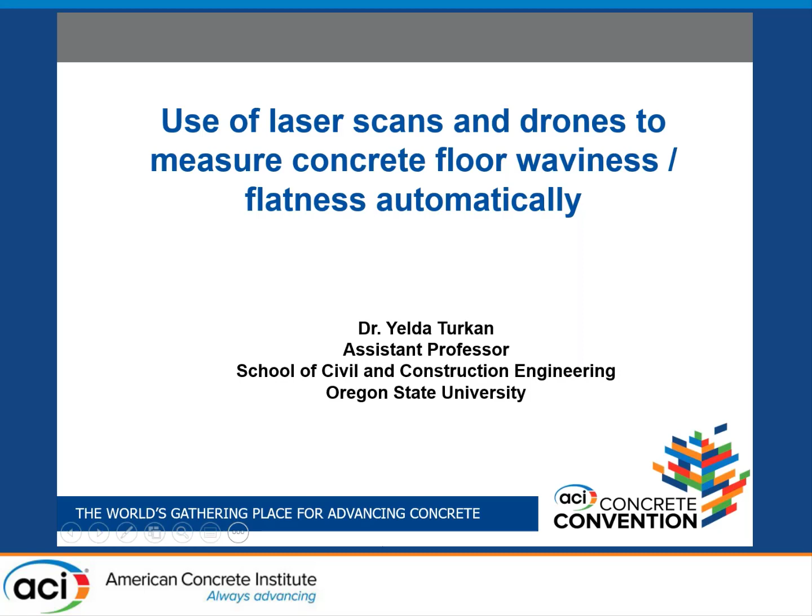Today I'm going to talk about how we can leverage laser scan point clouds and drones to measure concrete floor waviness and flatness automatically. This is an ongoing research, and I will present the preliminary results today.

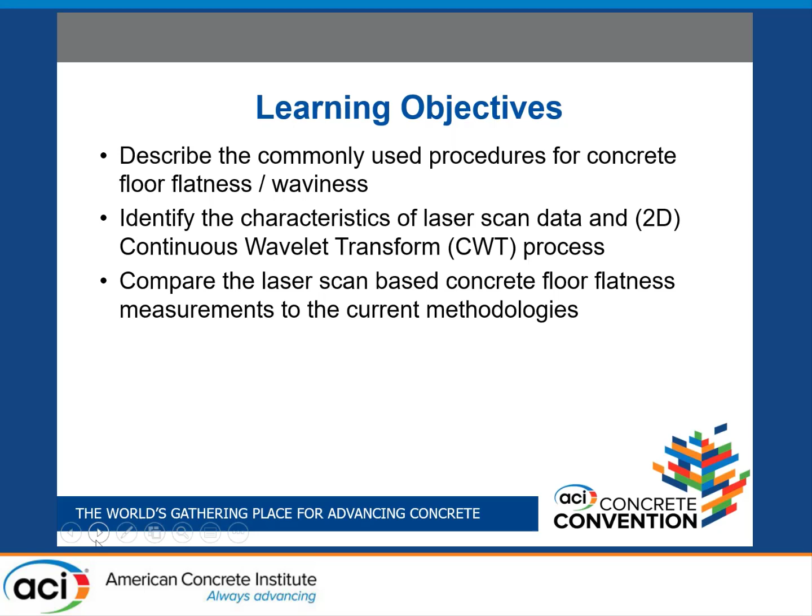Our learning objectives are: first, we will talk about commonly used procedures for measuring concrete floor flatness and waviness. We will identify the characteristics of laser scan data as well as two-dimensional continuous wavelet transform that we use to process the data. And we will compare our methodology to the current commonly used methodologies to measure concrete flatness. So why is measuring floor flatness important?

A step back - a more common term used is dimensional quality assurance and quality control. As we all know, as-built dimensions of cast-in-place concrete often differ from the dimensions originally specified in as-designed plans. Dimensional quality control verifies that elements are constructed in compliance with the specified dimensional tolerances, and failure to detect imperfections in newly constructed surfaces during earlier stages of construction may cause delays in carrying out necessary repair works, which can be very costly. Therefore, it's very important to carry out those inspections in a timely manner.

Focusing on concrete slabs, there are several factors that affect the dimensional quality of cast-in-place concrete slabs, such as temperature, placement, and finishing techniques applied during construction. Proper regulation and control of these factors are essential for achieving specified levels of waviness and levelness. Defects resulting from waviness of concrete slabs not only create aesthetic issues but also affect the efficiency of lift trucks and very narrow aisle vehicles.

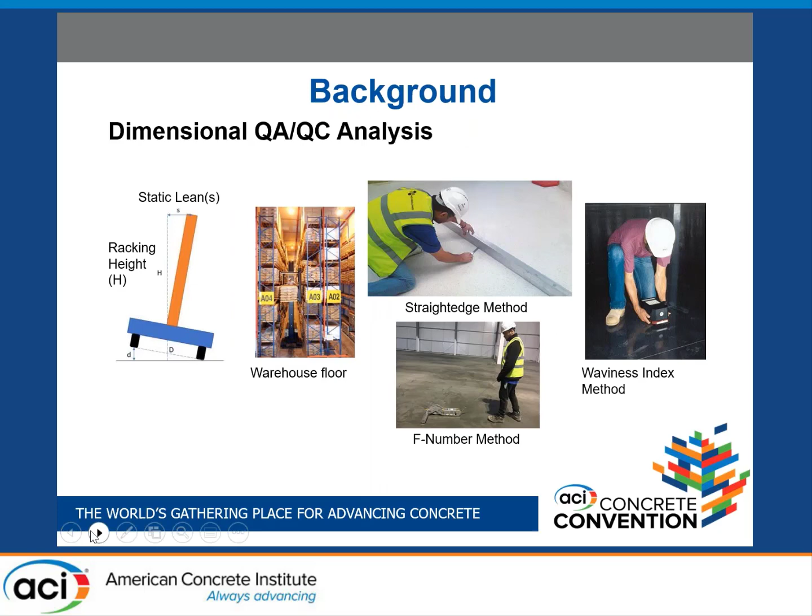So we wanted to see if we could leverage Lidar and drones to collect the data and get the waviness information from that floor.

For those who are not familiar with Lidar and drones - Lidar is also called laser scanners. They're basically high definition surveying equipment. The data you collect using Lidar equipment is basically a three-dimensional point cloud, where each point is associated with XYZ coordinates, and if there is a camera, it is also associated with RGB color information as well.

The use of laser scanners and drones within the last decade in the architecture, engineering, and construction industry has skyrocketed. You can use these tools and technologies for different applications, such as building damage assessment after natural hazards, landslide inventory, quantifying road roughness, progress tracking, and dimensional quality control is one of those.

You're perhaps familiar with drones, hobbyists use it, construction contractors started using it. The one thing about drones is that you can also attach different types of sensors to them. So it can be a regular digital camera to collect digital images or videos. You can attach a thermal camera, and in our case, we attach the Lidar sensor to the drone.

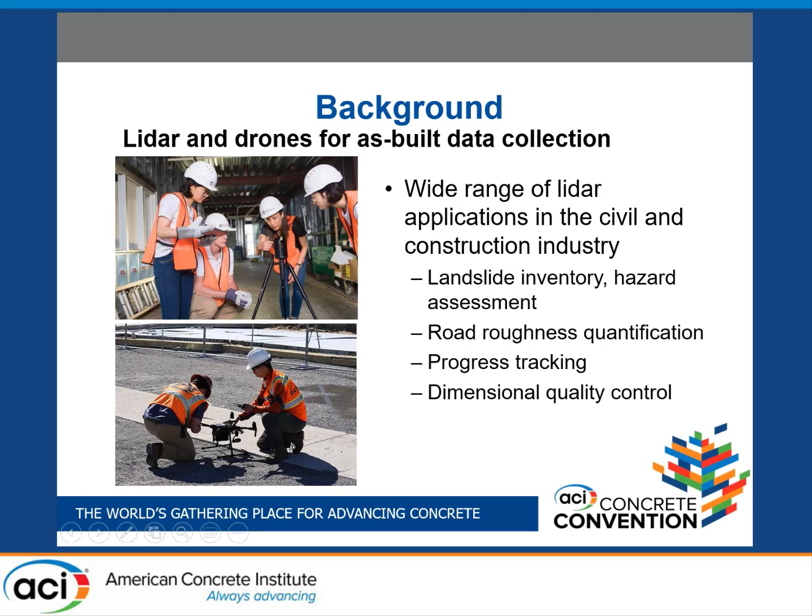So the Lidar sensor that is on the drone here and the Lidar sensor here are different in terms of accuracy. This Lidar can collect a laser scan that is very, very dense and accurate. The laser scan, the Lidar data we collect using the drone is fairly less accurate, so essentially you're collecting less data points. I will talk more about that in a little bit.

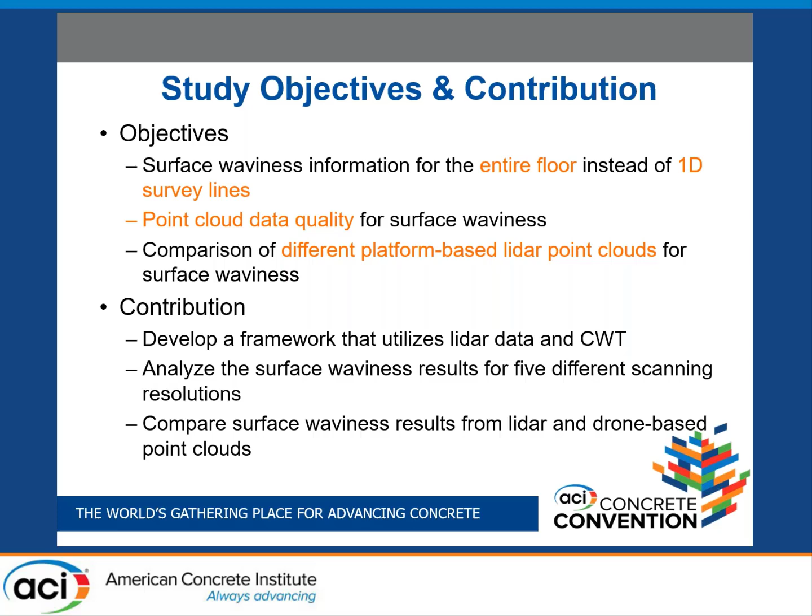Our objectives were to see whether we can characterize the entire floor using this laser scan data instead of using one-dimensional survey lines. We also wanted to look at the required data quality for the point clouds, because it may be computationally very difficult to process laser scan data if it's a very large project. So if you can obtain the same results with lower quality data, that is better, because it's easier to process computationally. We also wanted to compare tripod-based, also called terrestrial laser scanners, versus drone-based point clouds to characterize the surface waviness.

Our methodology: when you collect the point cloud data, the raw point cloud data consists of data points, in this case from a concrete slab, as well as its surrounding environment, including workers, equipment, and surrounding buildings. The point cloud is typically, for any project, a result of multiple laser scans registered together using a target-based approach. In our case, we registered 3 different laser scans together.

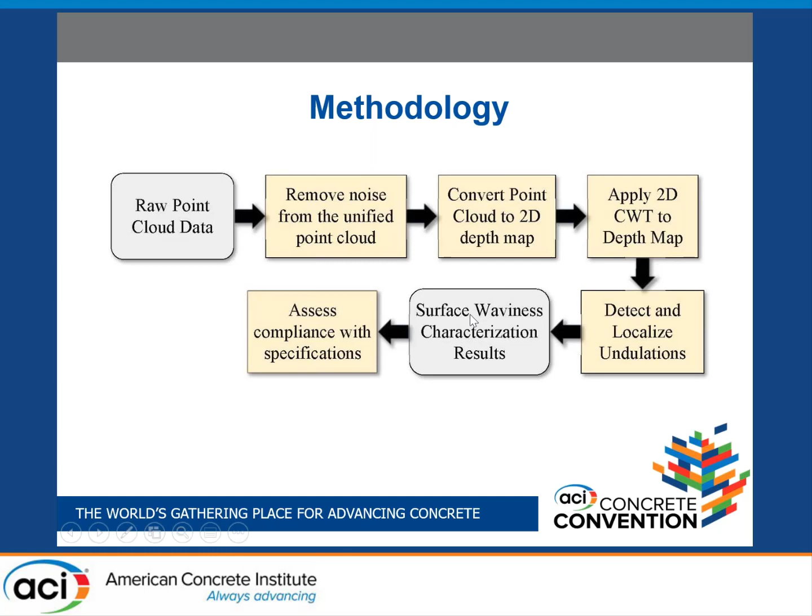Once we remove the noise and the information related to workers and equipment, that is called pre-processing. Then we developed the depth map, which we used as a signal for our continuous wavelet transformation, and we were able to detect and localize the undulations present on the surface. Then we could look at the compliance with the specifications at the end.

I'm not going to get into the mathematical details of wavelet transformation, but wavelet transformation has a wide range of applications in engineering, some of which include seismic signal analysis, sound pattern analysis, and quantum mechanics. Continuous wavelet transform of a given function basically is the inner product of the function with the scaled and shifted versions of the mother wavelet.

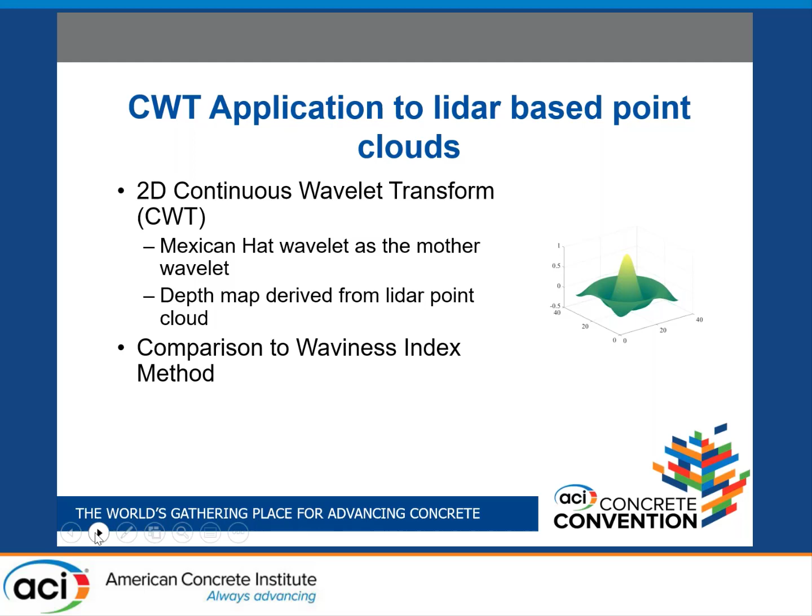This is the first case study I wanted to talk about. We collected data from a warehouse concrete project, a concrete slab. We used a terrestrial laser scanner, a Leica P40, one of their recent products.

We did the scanning within 10 hours after the concrete was poured, and the whole data collection, with all the setting up and everything, took us about 45 minutes, which is faster than collecting data using traditional methods for waviness measurements. This shows the entire laser scan, and this red portion is our area of interest. We removed all the other data points from the point cloud since we weren't interested in those parts.

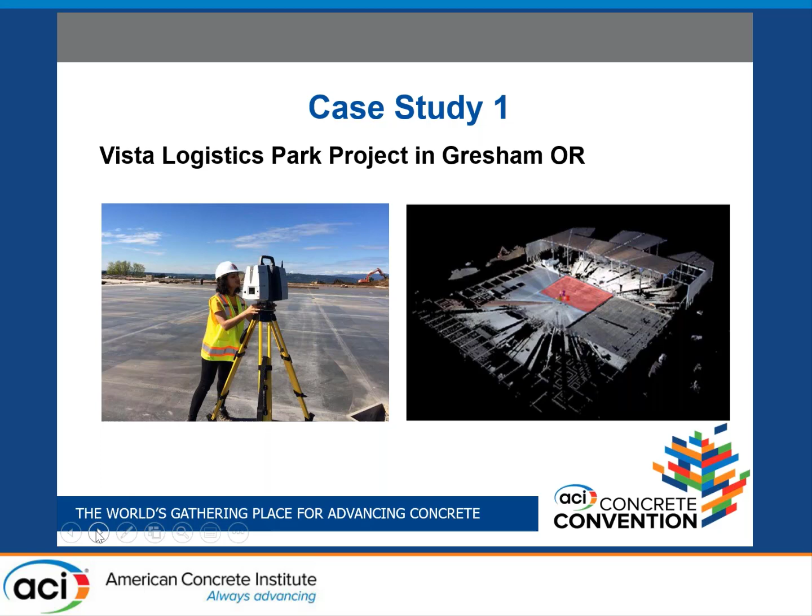We used regular off-the-shelf point cloud processing software to remove those points. The original point cloud had about 100 million points. After we removed the points we weren't interested in, we only had the points for the concrete slab, and then we converted that into a depth map with 1 centimeter intervals in both horizontal and vertical directions, calculating the z coordinates at each grid point.

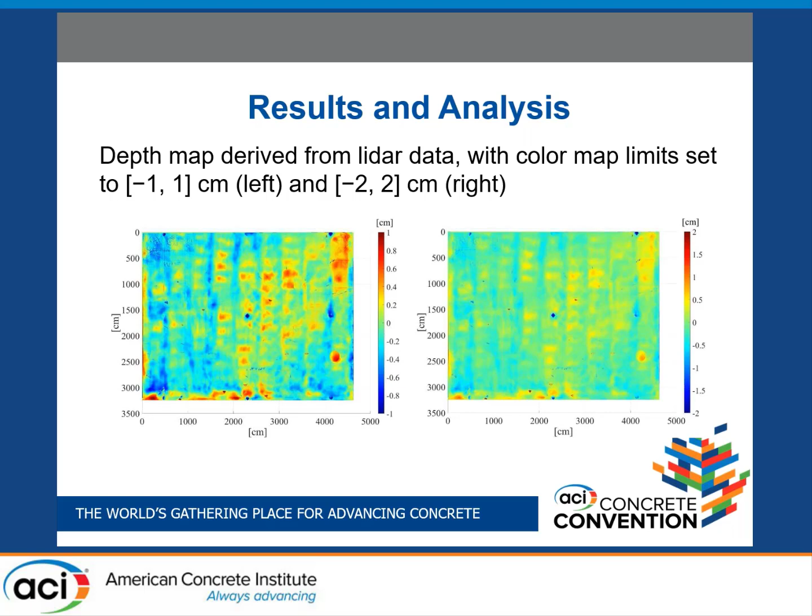This figure basically shows the result. As you see, the height differences with respect to the XY plane vary between -2 to 2 centimeters. These are the likely areas that have some undulations, because they differ from that average height. Then we applied our two-dimensional continuous wavelet transform here.

So here, these scales - scale 15, without getting into mathematical details, basically corresponds to 2 feet. So the undulations present on the surface have periods of 2 feet and 4 feet. Here you see there's a likely peak here and here as well for scale 30, which corresponds to 4 feet. And this kind of makes sense.

Everything else is pretty much at the same height, and this makes sense because in the previous depth map we saw that the slab is relatively flat with a few little peaks. In fact, the average value of the deviation in the z-axis height was 0 centimeters, with a standard deviation of 0.3 centimeters.

And the next slide shows the other 3 scales that we investigated. These correspond to 6, 8, and 10 feet. Here you see the same little peak, and in addition, in scale 60 and 75, you see an additional peak. So these show possible undulations at those locations on the slab.

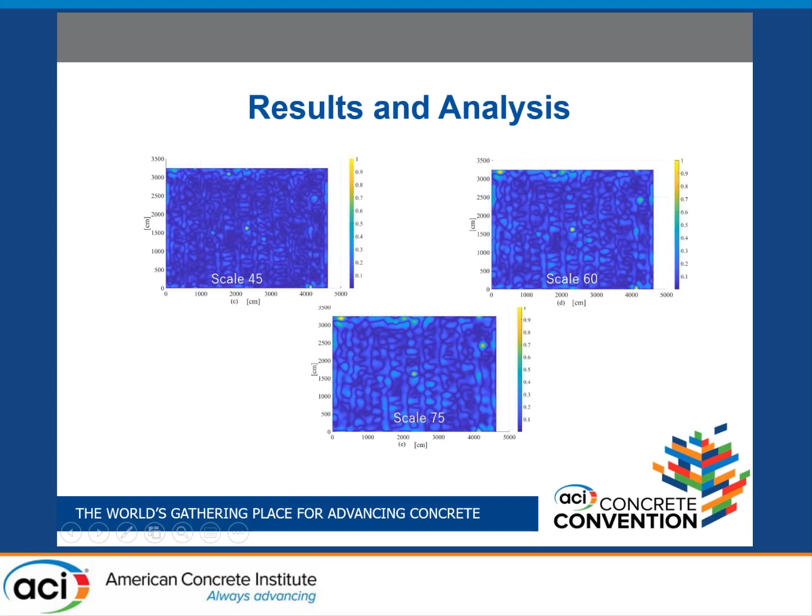This figure basically shows we applied 5 distinct periods, and this one shows the periods between 20 centimeters to 400 centimeters, which corresponds to 0.65 feet to 13 feet.

The advantage of our approach is that we combine the 3-dimensional data from laser scan and 2-dimensional continuous Wavelet transform. This can support the analysis of waviness with essentially any characteristic period, or wavelength. So this enables the approach to study waviness not just for a few distinct wavelengths like 2, 4, 6 feet, but for dense and large ranges of wavelengths.

And this figure demonstrates that these ellipses show possible areas of defects for these periods.

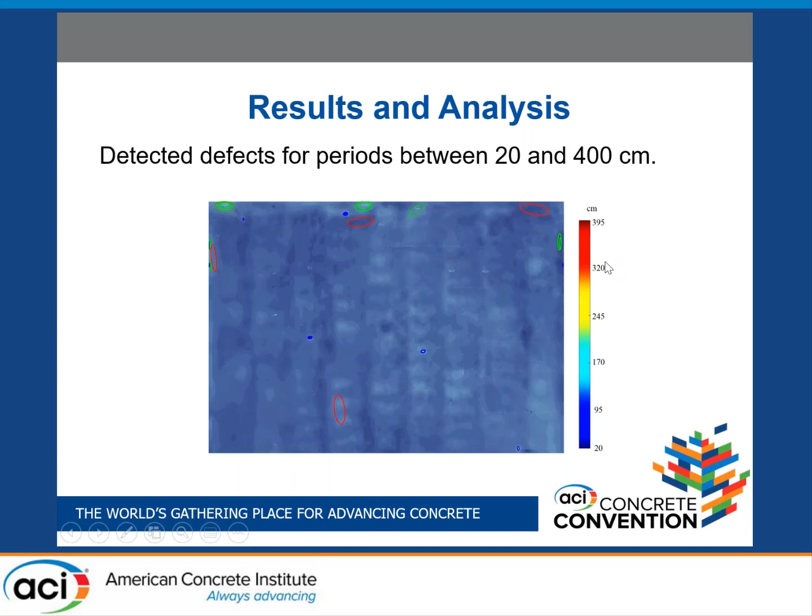In the interest of time, I will skip some of these, but we also applied the continuous wavelet transform. We applied the Waviness Index method to our point cloud data, and we compared the results to the length adjusted RMS deviation, which we call LAD, against our results from the 2-dimensional continuous wavelet transformation.

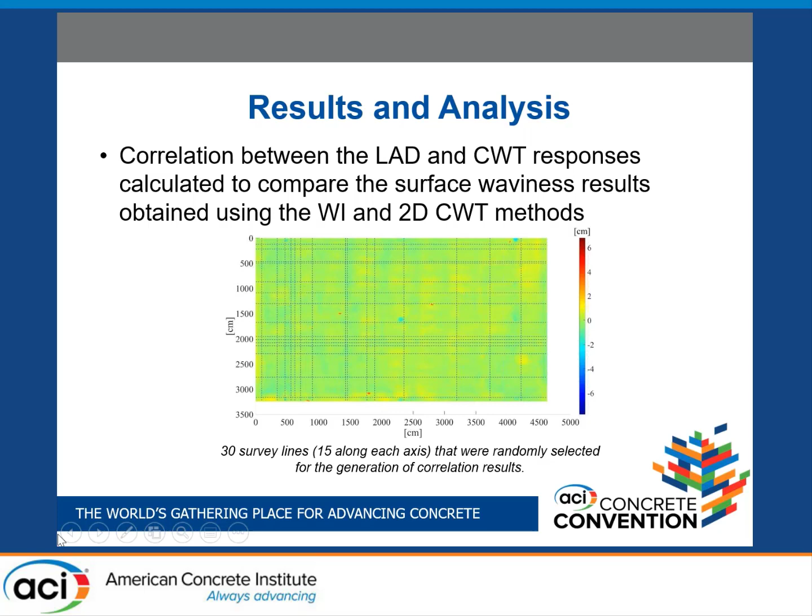We selected 30 survey lines, 15 along each axis. I'm going to quickly go through these.

So the results show that the length adjusted RMS deviation, the results we obtained using the Waviness Index, and the results we obtained using the continuous Wavelet transform were highly correlated. That basically shows that our method has promise in terms of finding those deviations and also locating them.

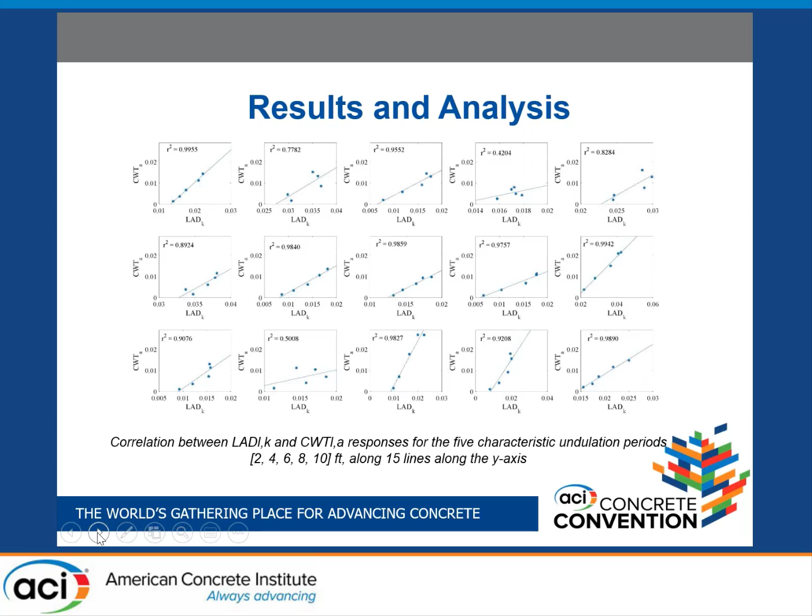So this table compares these methods as I just talked about. With other methods, you can only get information about the periods of undulations for certain periods. Using our method, you can identify those undulations for any period. You can visually see the output as a depth map, so you can see the actual location.

The errors aren't random errors. There is some systematic error that comes from the laser scan instrument itself. The data collection is very fast, and the data is not sparse. You can get a dense point cloud and find those undulations for an entire surface, and also you can visualize that data.

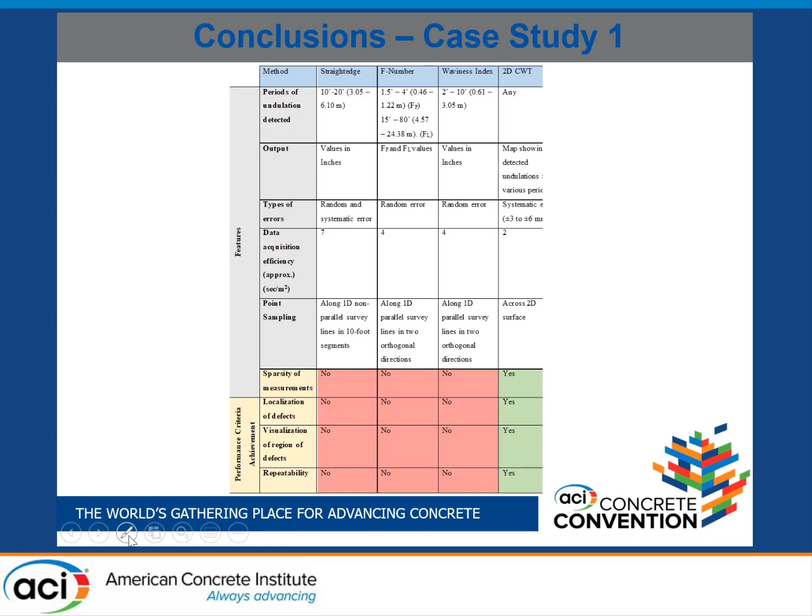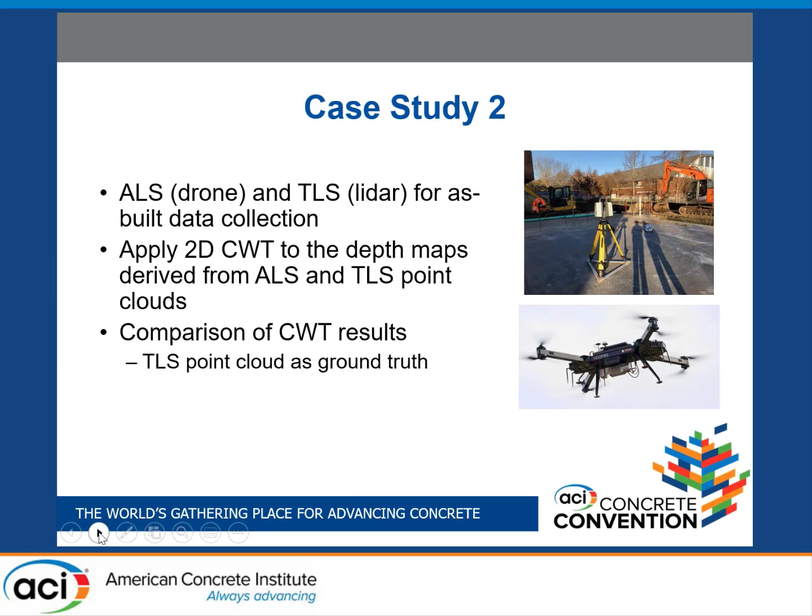So this is the Magruder Hall expansion project, a building at Oregon State University campus. These are the equipment we used, the Leica P40. We collected 2 scans, registered them together in the same coordinate system, and then we collected drone data with a Lidar unit on it. We did 2 passes.

The spatial resolution here, I would like to show, was fairly low compared to what we had before. This is 5 centimeters spatial resolution, and for the terrestrial laser scanner it was 5 millimeters. So basically you have fewer points to identify the surface.

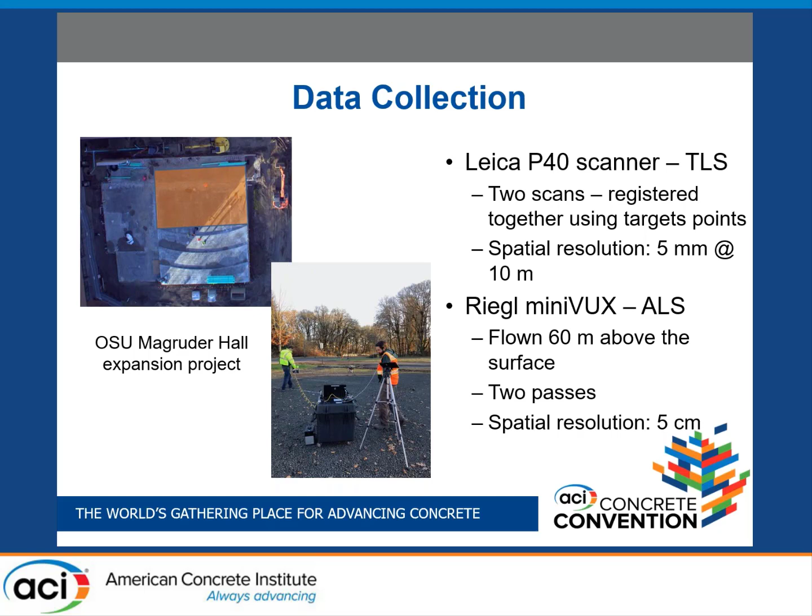So again, similarly, we used off-the-shelf software to clean up our data. We removed the noise, and we developed the depth map. After we got the depth map, we applied the 2-dimensional continuous Wavelet Transform for the same scales as the previous study, 15, 30, 45, 60, and 75, which corresponds to 2, 4, 6, 8, and 10 feet.

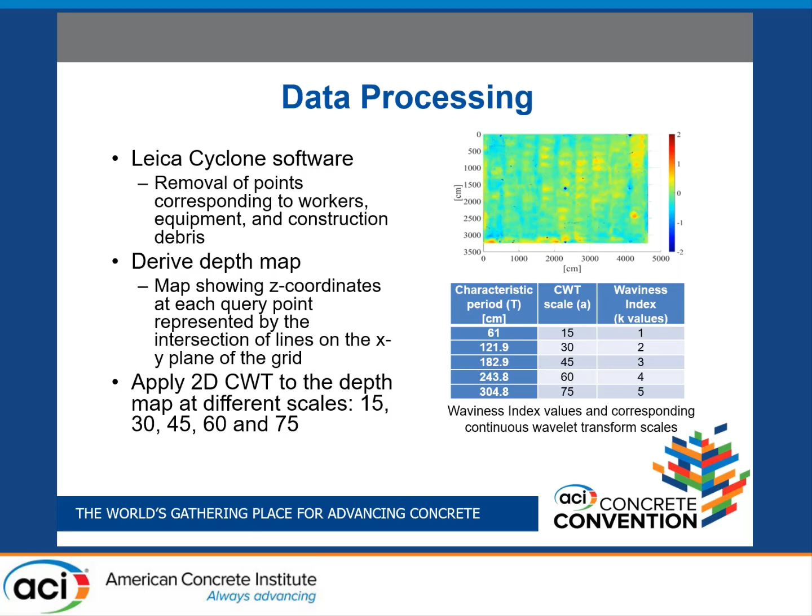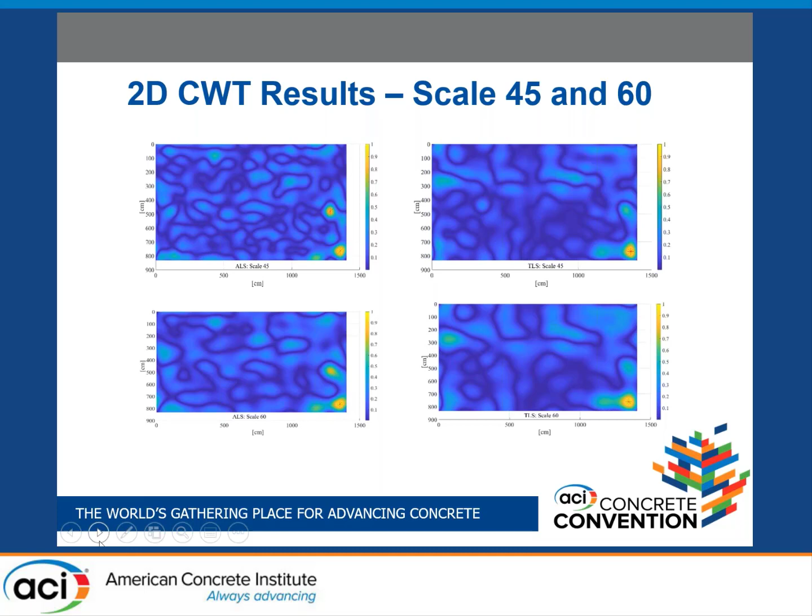There is a false positive here in the drone-based data, and for scale 60 it's pretty much the same. It's a little different there, but the other one shows the same, shows some irregularity in that area as well. And for 75, the results correlate with each other.

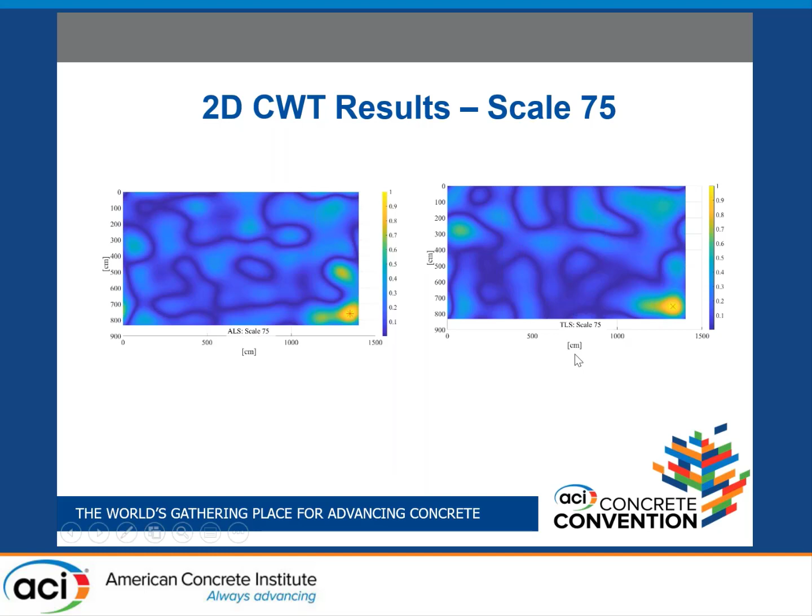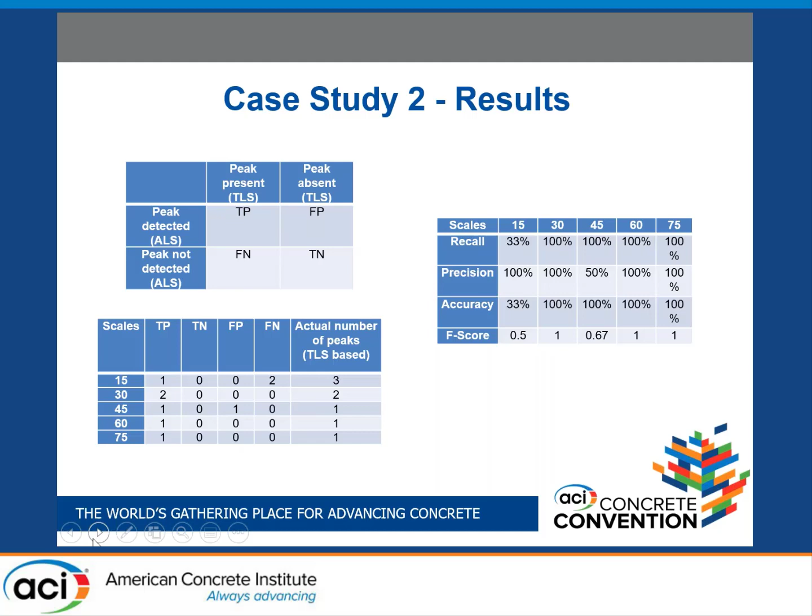So we looked at the recall, precision, and accuracy values for frequencies. For scales 30, 60, and 75, they largely agreed in terms of detecting those undulations, but for other scales they were different. We thought there are several reasons: the spatial resolution of the drone is lower, and this was our first experience with this.

We figured that we should have flown the drone at a lower altitude. So drones have advantages, right? You can collect data non-intrusively because construction sites are dynamic, and you don't want to interrupt the current operation. If we can use drones for this purpose, that is perfect, and we're currently still working on this.

Again, we obtained comparable results for the 4 feet, 8 feet, and 10 feet undulations, and we obtained different results for scales 15 and 45, which correspond to 2 and 6 feet. One of the things that can be done is flying the drone at a lower altitude, and increasing the number of passes could also help to increase the resolution of the point cloud that you obtain.